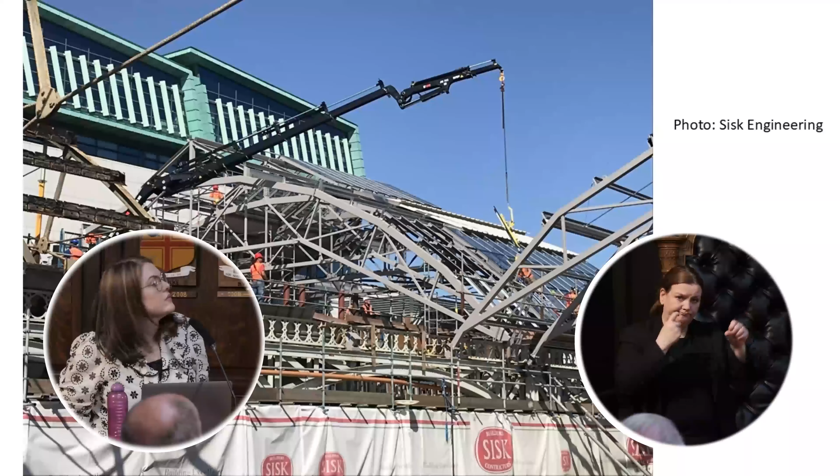The engineer for that was Thomas Benjamin Grierson. This is a close-up of the restoration work that's taken place. They've managed to keep an awful lot of the 1891 fabric of cast and wrought iron structure, but they've also replaced it - you can see the original fabric down on this bit. They've done a very nice job, I think, of restoring the station roof.

This is the Loop Line under construction. It was completed in 1891, and you can see the original station just here - this window here, this bit. This is obviously a separate building. Obviously that gets completely demolished, but it's nice to be able to see the kind of modernisation happening with the installation of the Loop Line, and rather than just going by a drawing, we actually have photographic evidence of the original station building. That's not often the case.

So, like I said, the Loop Line bridge, as well as the new facade, was designed by Thomas Benjamin Grierson. Again, this is an engineer designing the front of a railway station, predominantly because it's made in iron. Iron tends to be the domain of the engineer. Engineers love cast iron - it's easy, you can order it from a catalogue, it can be made in repeat patterns and installed. It's light, transportable, and incredibly cost effective. And of course it's strong and lasts a very, very long time. And it's highly decorative.

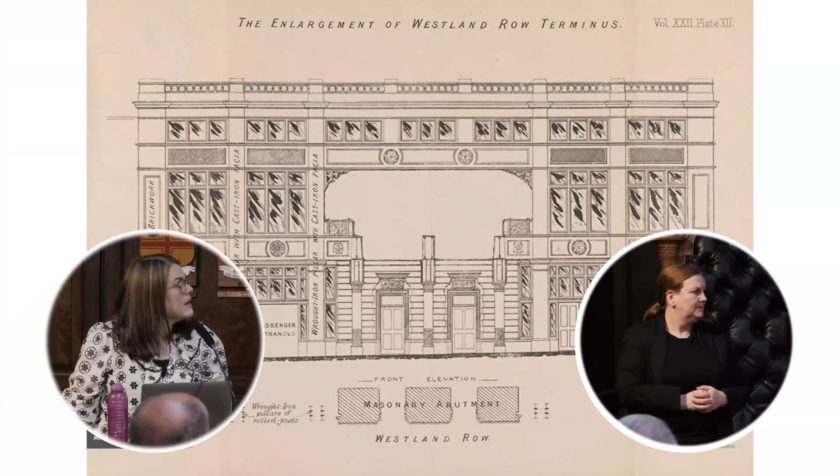So this is the original drawing, design drawing for it. What's interesting is it largely respects the original design of Vignoles' first railway station, in terms of symmetry and in terms of the openings at the front. Again, you have the cab exit gate on the left-hand side, which matches that opening we saw on the original station.

And like I said, it's really interesting to get up close. I think because it's painted brown, Pearse Street gets a bit of an unfair treatment as being quite an ugly railway station - I don't think many people like it very much. I've certainly taken students here and said, come on, look up, look at these amazing mouldings, and they just think, ooh, this is disgusting, I don't know why we're looking at this. And I'm there going, industry, come on! But really, when you look at the sheer amount of mouldings and the liveliness of the facade, all generated by cast iron, it's the epitome of late 19th century engineering and mass manufacturing. So if you want an example of really when railway construction and engineering is at its peak, I would say the front of Pearse Street Station provides it, with graffiti and everything added as well.

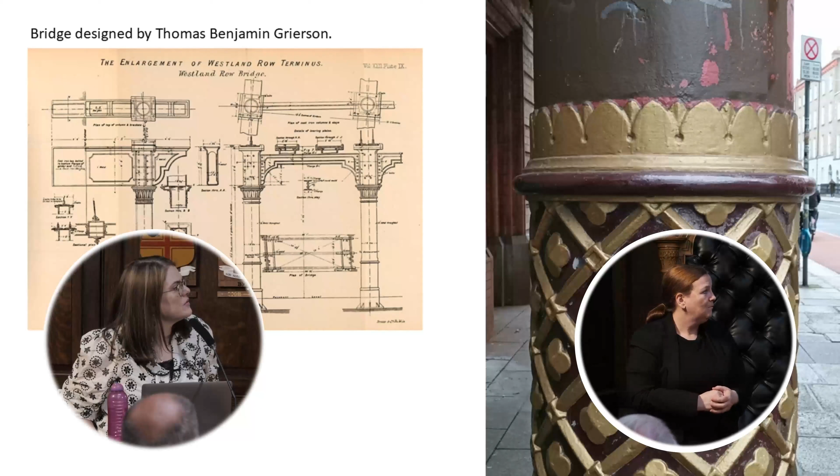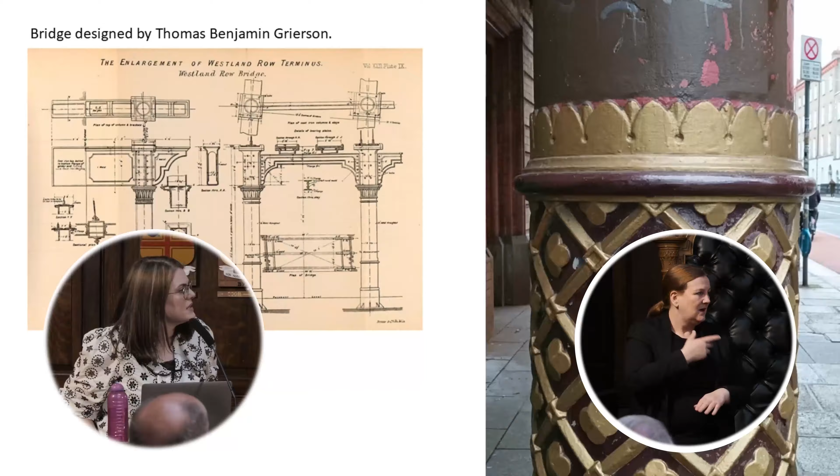This is Grierson's design drawing for it as well. It goes to show engineers knew what a Corinthian capital was - they didn't necessarily know how to pair it and make it match with other things. But I love these bases - I mean, what is that based on? It almost looks like some kind of medieval manuscript or something from a church, but it's thrown in there. It's fantastic - this is late 19th century eclecticism in practice.

And the brickwork was updated by Thomas Newenham Deane. He was an architect, but again it's a perfect example of the use of mass manufacturing and catalogues, this time in brick. How many shapes of brick do you need to design a door opening?

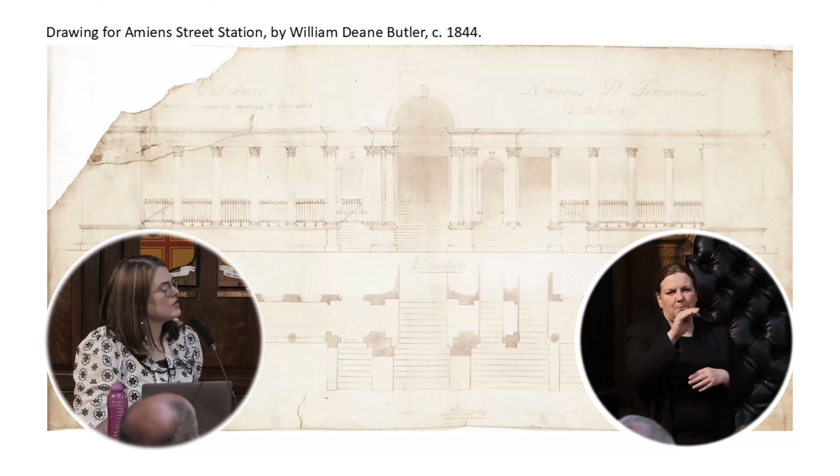It's very interesting. One thing I really liked was finding the original architectural design by William Deane Butler. This is hidden away in the Irish Railway Record Society archives - they have hundreds, if not thousands, of original architectural drawings for all the railway companies in Ireland.

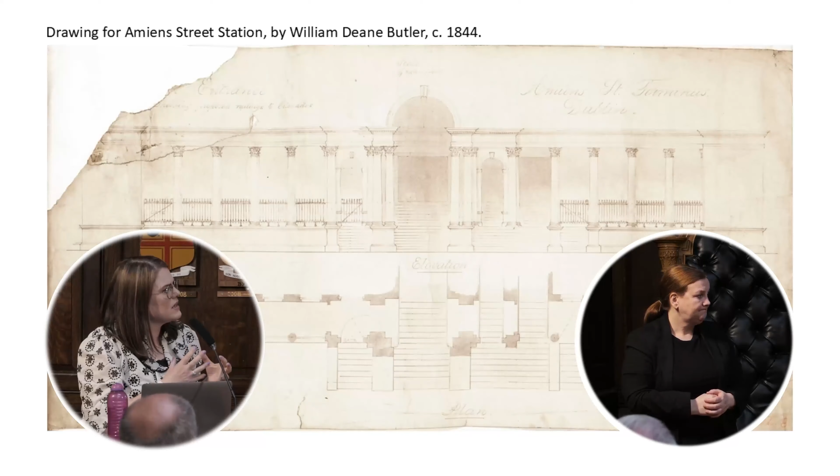I've actually had to enhance this so that you can see it a bit more clearly on the screen, but it's very dark, and the sketches aren't formalised - this is very much taken from a sketchbook, only about this big. So it's really straight from the mind's eye of the architect - the design for the front entrance of Amiens Street Station.

It's built from Wicklow granite, which comes from Ballyknocken in the Wicklow Mountains. The quarry was owned by a man called Patrick Olligan - that's probably a misspelling and mispronunciation. He originally had a quarry in Kildare, but either the quality of the granite was starting to disintegrate, or he realised there was a larger market to be had from the Wicklow Mountains. So he brought 400 men - this is the written account - marching with him, and they descended on County Wicklow and set up a quarry at Ballyknocken.

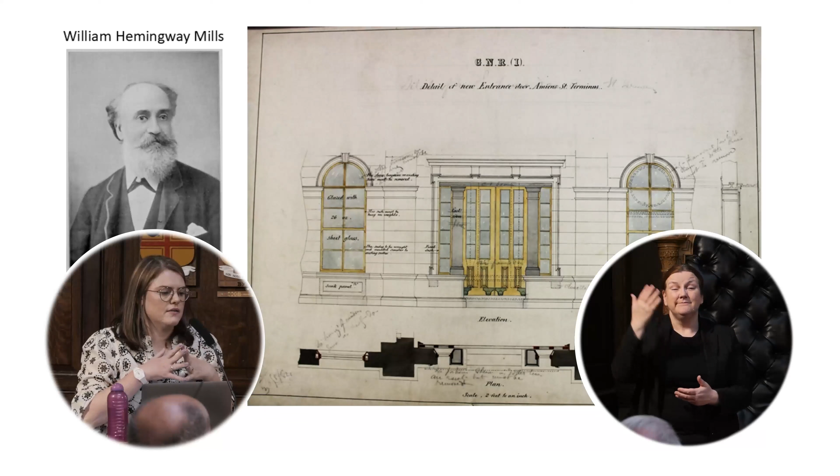One of the first changes he made to Connolly station was a new entrance. This entrance has now been replaced by the Luas, so now this is gone. The original station used to have steps to the southern entrance.

That was William Deane Butler's design. Mills came along and installed an enormous ramp, gently sloping all the way from Amiens Street up to the top level. If we think about Connolly station, the concourse is on the first floor, so the ramp brought you from street level all the way up to the first floor. This was the new entrance, and the doorway in the middle is actually a revolving door, which feels like an engineer having a bit of fun with some new technology.

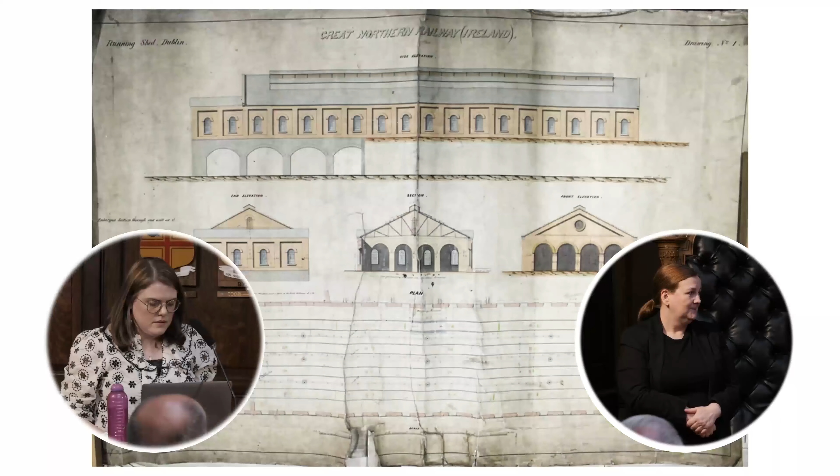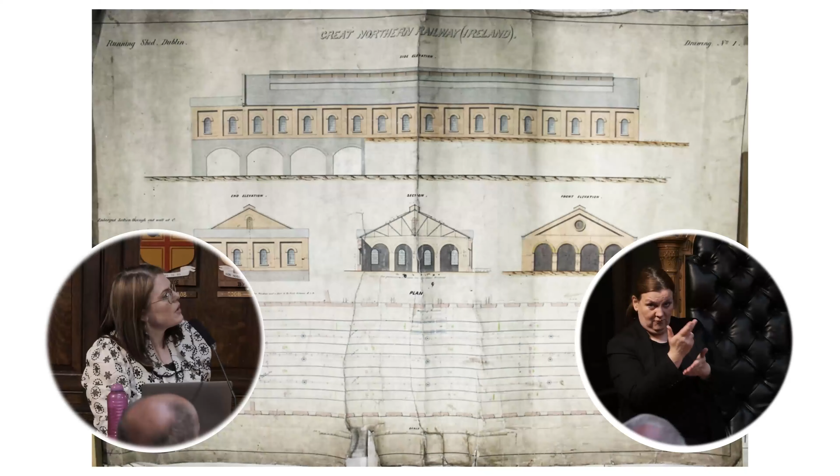Another upgrade to Connolly station made by Mills - you can see his signature down there - was to construct this enormous running shed. This runs the entire length of the platforms, and you can see it from the eastern side of the station, so you have to walk to the back of it. It's probably one of my favourite features of Irish railway architecture.

We've got this round arch style being enacted, which has its basis in Italianate architecture, the same as the front of the station. But Mills is taking that style to an enormous magnitude, a monster level of installation. There are 25 of these round arches, stretching the entire length of the platform, all constructed from mass manufactured red and yellow bricks - again a testament to engineering and industrial mass manufacturing.

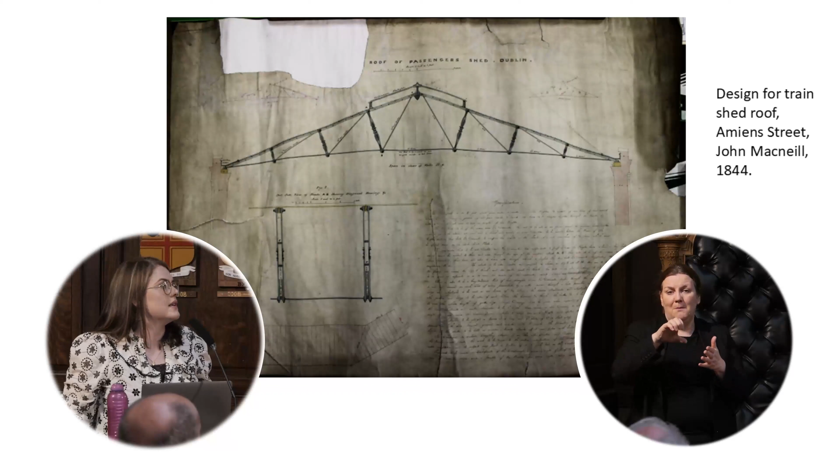And so we come to the original train shed. Like I said, it was constructed before the main station building was completed, so the roof was finished in 1844 and it was designed by Sir John Macneill, an Irish engineer who was born in County Louth. This is his original design drawing for the shed, and his signature is down there in the right hand corner - hopefully you can just about make it out.

William Hemingway Mills replaced Macneill's shed in 1884, and these are the piers and arches that you can see surviving down on the right-hand side of that image. The top of the roof was completely replaced, I think around the 1990s, early 2000s - somebody may be better able to correct me on that.

But I'm going to introduce you to an ironmonger called Robert Mallet. His foundry with his father, John and Robert Mallet's, was at Ryders Row, right in the centre of Dublin, literally just at the top of Capel Street. Get a sense of industry - Dublin is very much an industrial city. This is a point I really like to stress: there's a misconception that Ireland was never industrialised, that they didn't have any industrial revolution. They did. Irish railways are the epitome of industry and industrialisation, and all of this iron, all of these building materials - bricks, granite, and so forth - is all coming from within the country. It all had to be extracted, manufactured, handled and installed by Irish craftspeople. Thinking about iron foundries slap bang in the city centre is really quite incredible, and the fact that their work still survives to this very day.

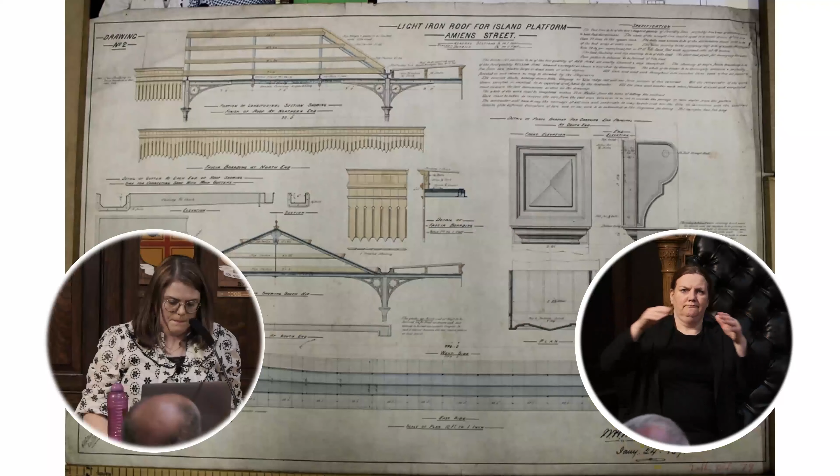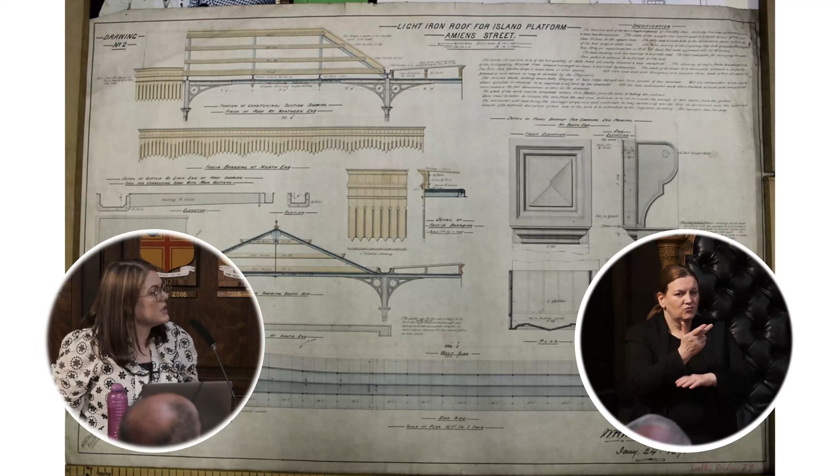We return to the Loop Line bridge, and this is the Loop Line itself, and the platform that was constructed at Connolly Station for it. Again, this is designed by William Hemingway Mills, and this is the original design drawing for it. I mean, I love these drawings. I won't go into them too much, but basically my PhD is essentially about these drawings.

But again, it survives to this day. And the use of cast iron, with these medieval quatrefoil mouldings that are really for window tracery in churches, actually being used in cast iron spandrels to support a truss iron roof. Again, it's all original and it all exists and it's still there today.

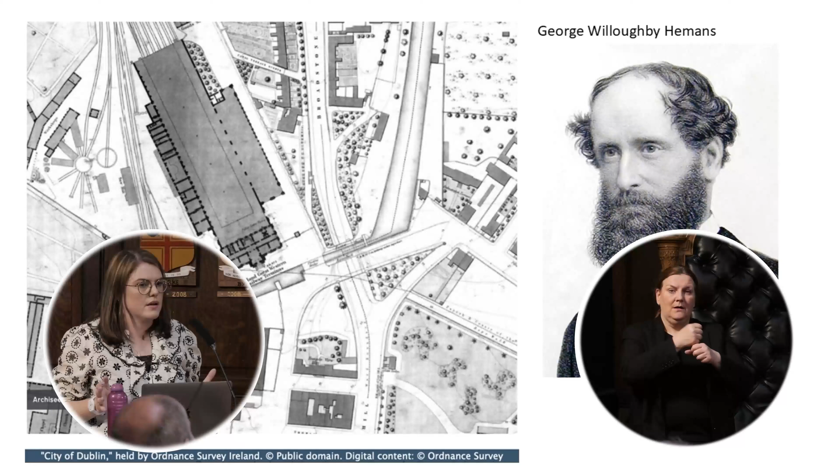So this is a floor plan, an aerial plan for Broadstone station. One interesting feature is that the canal, the Royal Canal, used to come right up to the front door - you can see it here, all the way here, and continuing across here. This here is a pontoon bridge - actually a floating iron bridge which provided vehicular access to the railway station, designed by Robert Mallet, who we met earlier. And I should say, Mallet also provided the ironwork for Heuston station.